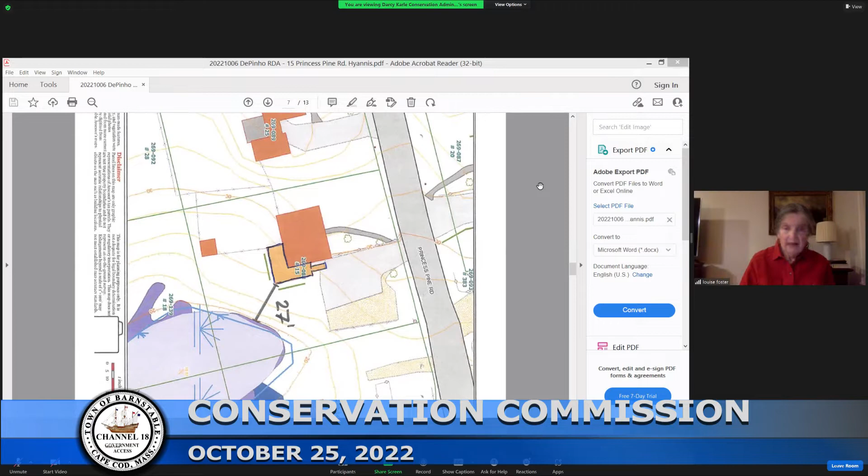Okay, commissioners, questions, comments? Quick question. Mr. DePinho, I gather from this that this is exactly the same footprint, same size as what is existing. Is that correct? Yes, correct. Thank you. I thought so. Channel 18, are there any public comments? Seeing none. Okay, thank you.

Could I have a motion to approve this project as a negative determination? Second. Roll call? Morin, aye. Sampou, aye. Abadili, aye. Foster, aye. Gilmore, aye. Hearn, aye. That's unanimous, Madam Chairman.

Thank you. Next is Michael W. and Judith M. Berry. Build sunroom with existing footprint at 288 Neck Road, Centerville as shown on Assessor's Map 252, Parcel 133. Who's representing the Berries? Anyone? Well, let's table this and, oh, sorry. We were muted. Can you hear us now? I can hear you. This is Judith Berry and Michael Berry. Good, thank you. Welcome.

So are you going to speak to your project? Yes, we had a tree that uprooted and went through our glass solar room last October. We would like to replace that solar room with a new solar room on exactly the same footprint. It is the upper level of a storage unit underneath. Okay. Anything else? I think on this map the work limit line is going to be the deck underneath, so the contractor's line cannot go past where the deck ends. And it's exactly the same footprint.

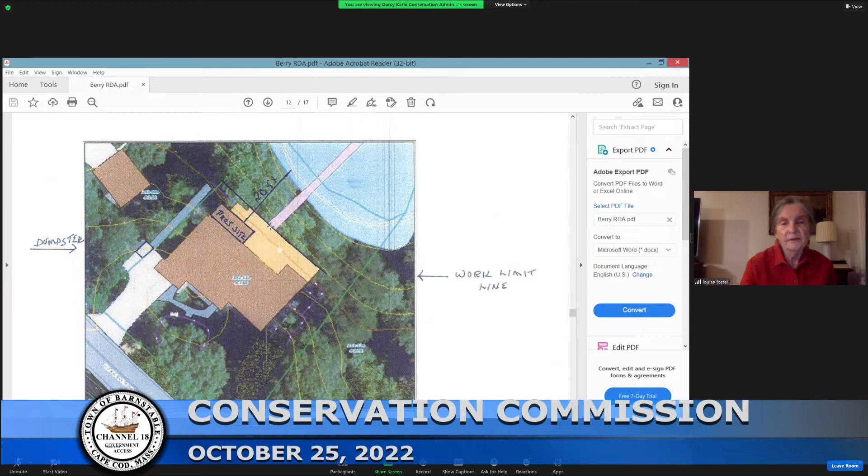Commissioners, would you like to ask any questions? No questions. Channel 18, are there any public comments? Seeing none. Darcy, are you fine with this? I am, thank you. Motion for a negative determination? Second. Roll call. Abadili, yes. Foster, aye. Gilmore, aye. Hearn, aye. Morin, aye. Sampou, aye. That's unanimous, Madam Chair.

Okay, on to the NOI. Herlihy Family Limited Partnership, completed existing shed, proposed fencing, pond wall repair, and buffer land management and restoration at 103 Blantyre Avenue, Centerville, as shown on Assessor's Map 229, parcel 008.

This is Josh. Hi, this is Katrine from Wilkinson Ecological Design. I believe Chuck is here too. Yep, he is. Chuck? There he is. Sorry about that. Chuck Rowland, Sullivan Engineering. Heard my name getting called. I was just in the other room. You guys got through the RDAs quicker than I thought. Chuck Rowland, Sullivan Engineering Consulting.

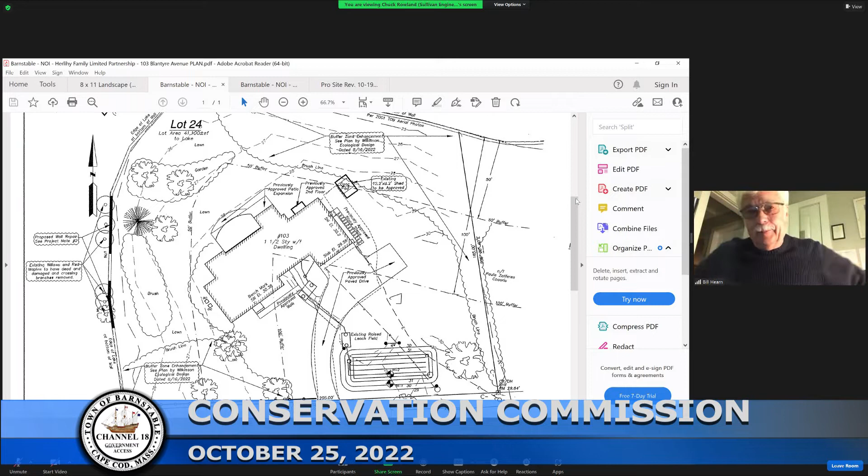Anyone else? Oh, I do. Sorry. Yes, this is a question for Katrine. As far as working down at the edge of the lake, are you working in any of the bordering vegetated wetland? The reason I'm asking is I'd recommend a special condition about this staying under Wilkinson, like notification of any change of the contractor for the restoration, but also given the close proximity to the lake, do we want to also state that this needs to be done by a SERP qualified consultant in the future in case anybody wants to change out the consultant?

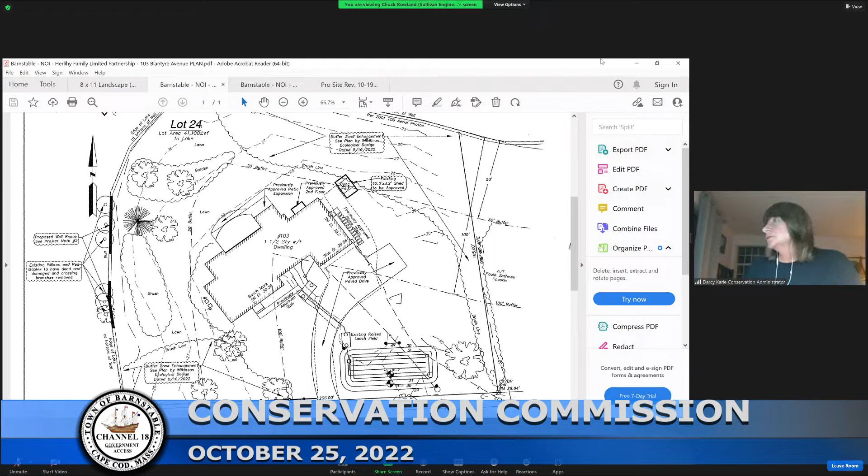So could you just answer that about the proximity to any bordering vegetated wetland, or are you right on the edge? I believe we're right on the edge because there's the wall there, but I can't necessarily see where the BVW is on our plan. I don't know, Chuck, if you know specifically. I see edge of lake at bottom of wall. But those conditions work for us. Okay. So I would recommend the commission state notification of any change in contractor, they need to be SERP qualified, and annual monitoring reports for 3 years, please. Also, what is the fence height going to be? And will there be 6 inches below the fence?

They were asking for a garden fence, and it was kind of similar to a pool fence type, but we're happy with 4 inches below or 6 inches below, whatever the preference is. So when you find out exactly what fence type it is, could you just run it by Darcy to make sure she's happy with it? Okay. If you'll approve a pool type fence, then we have to make an adjustment.

Pool type fence could be a lot of different things, I think. As long as you let them go to Darcy, as long as she's happy with it, that should be fine. Yeah, the only thing we would state is if right along the edge in the 50-foot buffer, if we could have it raised 6 inches. 6 inches. Okay. So you have proposed a 4-foot tall garden fence. You might want to just, on a revised plan, say it's a 6-inch clearance in that area.

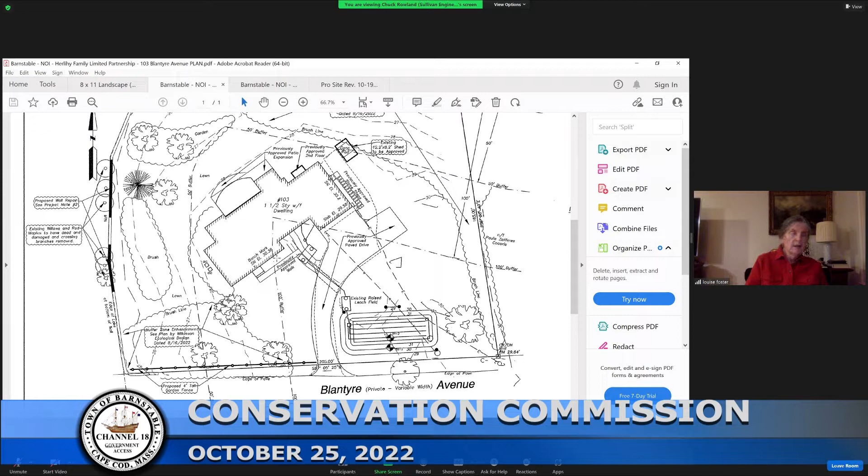Okay, channel 18, are there any public comments? Seeing none. Could I have a motion to approve this as submitted with the addition that there will be annual reports on the progress of landscaping, that if there's a change in the landscaper, that change will be qualified and reported to the office. And I'm sorry, you want a 6-inch gap underneath the fence on a revised plan?

And 3-year monitoring also. I think she had that already. Annual reports. So moved. Wait, I'm sorry, hold on. And beside the consultant, any consultant would have to be SERP qualified. Okay. So I'll include that in the motion and make the motion. I'm sorry I jumped in, Darcy. You're okay. Second? Second the motion.

Okay, roll call. Abadili? Aye. Foster? Aye. Gilmore, aye. Hearn? Aye. Wait, I'm sorry. We got to stop a second. This is NHESP habitat. I'm not aware that we received the letter. You could vote for approval, but you have to wait for the NHESP letter. Sorry, I apologize. Have we received it yet, Chuck?

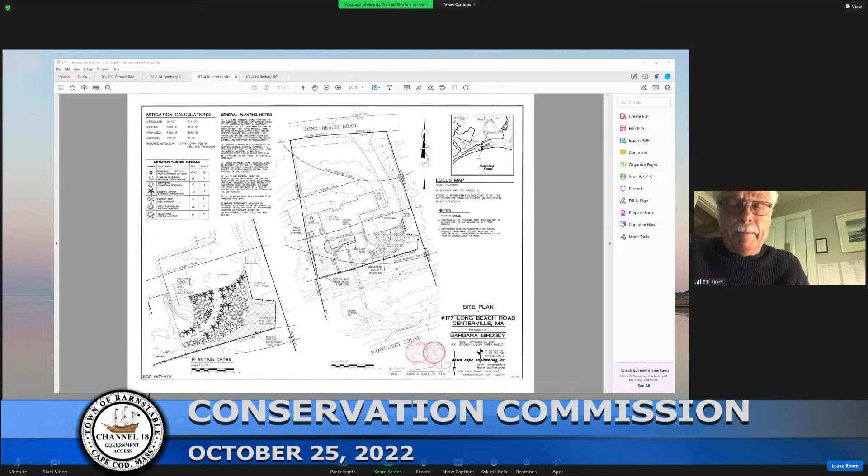And our bylaw basically suggests that, except for really unusual circumstances, we don't want to promote the expansion in the 0 to 50. And so I guess I have a real problem with that patio. However, the rinse station, I don't have a problem with. It's out of the 0 to 50. Anyone else?

Larry? Yeah, mute myself. I'm going back to the balancing test that was discussed a few minutes ago. I went to the property twice because I really tried to visualize it, and then came back and studied the plan and had to go back again. And so I'm looking now, Dan, at what you described; this thing sort of looks like a fancy pipe going around the edges of the patio.

And what you're telling me, I think you said it was 150 square feet. Is that right, approximately? The expansion in the 0 to 50 is 175. It's going from 1610 to 1785. But it's in a highly developed area that's existing turf lawn right now. It's not like it's a virgin site, and there's a fence seaward of this. You use a Lawn-Boy and put down fertilizer. It's not a situation where you're cutting virgin material by any event.

No, I don't dispute that. I'm just looking, Dan, at the hardscape, and let's talk about that just for a minute. That's a good picture of it, by the way. The other thing I'm looking at is that this area here is pretty steep actually. So I take it it's a flight of steps coming up. I don't know how wide you want that to be, 3 or 4 feet, but coming up from the driveway right there, that's pretty steep, at least for somebody in my stage of life.

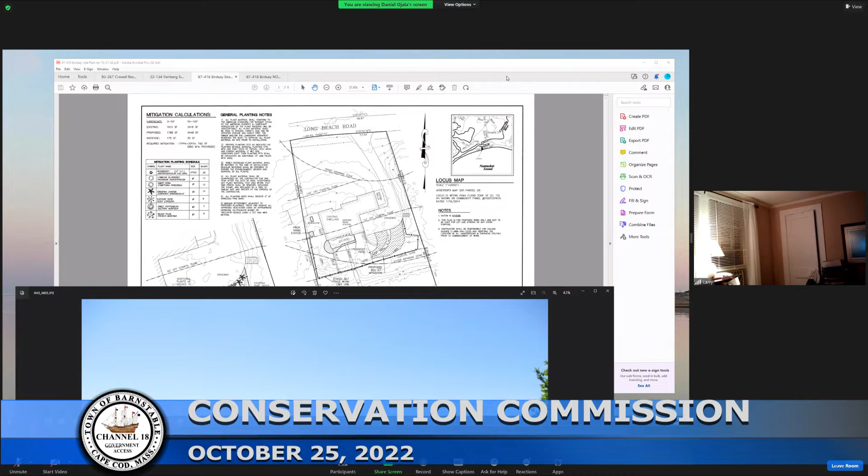And if other commissioners feel they would like more mitigation, I think there's room here to do it that would not disadvantage Ms. Birdsey's use of the property. Something to consider. So that's where I am on it. Thank you.

Anyone else? Yes, ma'am. Oh, John, thank you. Thank you, Louise.

A couple of comments. Again, I sort of start with Bill, that anything that's an expansion of hardscape within the 0 to 50, even, Dan, over grass, hardscape over grass is not much of a trade. So your argument that it's all pre-existing lawn doesn't carry a lot of weight with me. It is an expansion within 0 to 50. We should look at it very, very carefully, maybe suspiciously is the wrong word, and find out what we're getting in return for that. And is it a better deal after, in terms of protecting the 0 to 50 and serving its function, than prior to the requested change?

In this case, I see two things. One, I see a heavily vegetated bank that exists already, which makes me very happy. I look at the mitigation being offered, and I have two comments on that. Number one, I think you put it into an already heavily vegetated area. So the mitigation should go, instead of that area right there, more along the waterfront line where the walkway is. Secondly, if there is going to be some kind of path, it should be defined in terms of width and structure, et cetera. I couldn't find any specs on the proposed path. So I could support it if the mitigation was relocated.

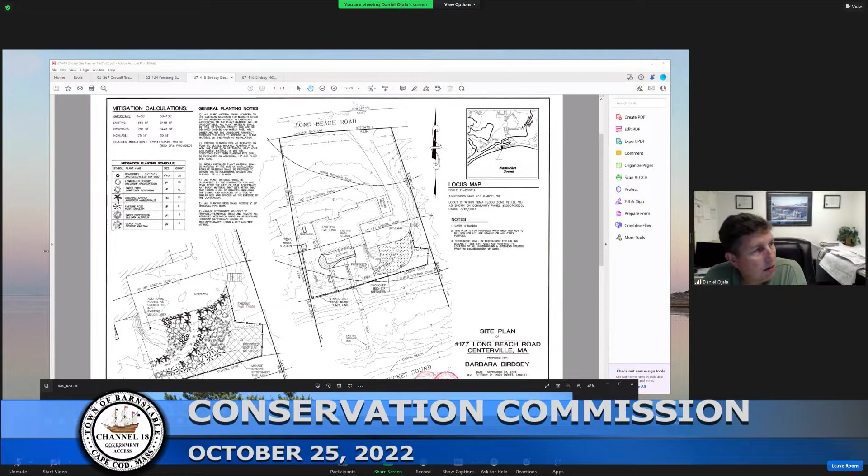Dan, I didn't mean to interrupt, but if you could show that other picture where the walkway is, get a long view of that, that would help me and the other commissioners see what I was talking about. This is the area we would alternately also infill with some vegetation. There's a couple of rugosa roses in there, I don't think they did too well with the drought this summer.

The mitigation plantings, in my opinion, should be located in that area, which is far less shrubbed and protected than where you're proposing to put them. So in terms of the mitigation impact, as I weigh the balance between what you're asking for and that, I think it is significantly enhanced in your favor by relocating those plants to that area.

And I think that's what Pete was saying, I think. That's what I was saying also, I was suggesting it in a different way. Yeah, I think we're all on the same page, just different paragraphs.

Bill Hearn has his hand raised. I do, and I'm not on the same page. I think it's a slippery slope. We have a bylaw that basically says let's try to keep hardscape out of our 0 to 50, and there's a good reason for that.

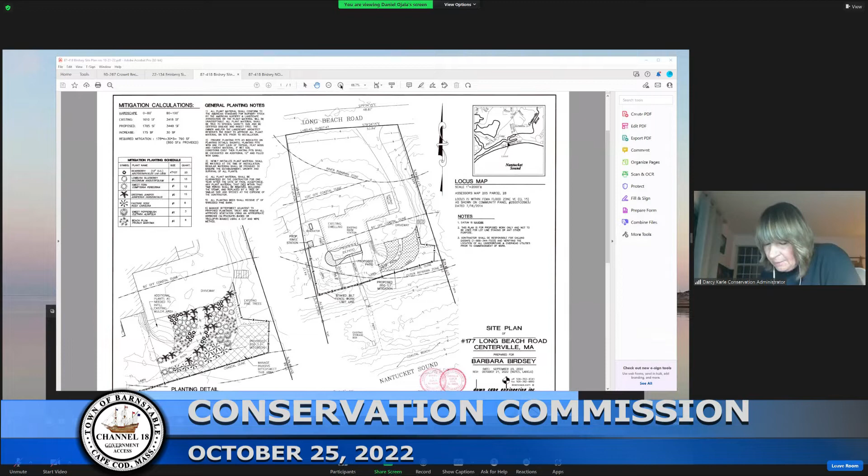I have a comment on the planting palette. If we went forward with the mitigation being adjusted, it's a lot of 1s and 2s, I'd like to see some 3-gallon or 5-gallon mixed in. I also had some concern on the general planting notes - when it says planting beds shall receive shredded pine bark, that should just be temporary; once the mitigation planting goes in, it should be left natural, not be a planting bed. Another note talks about the material surviving 1 year, so we would want a 3-year monitoring report. I would agree with all of Darcy's suggestions.

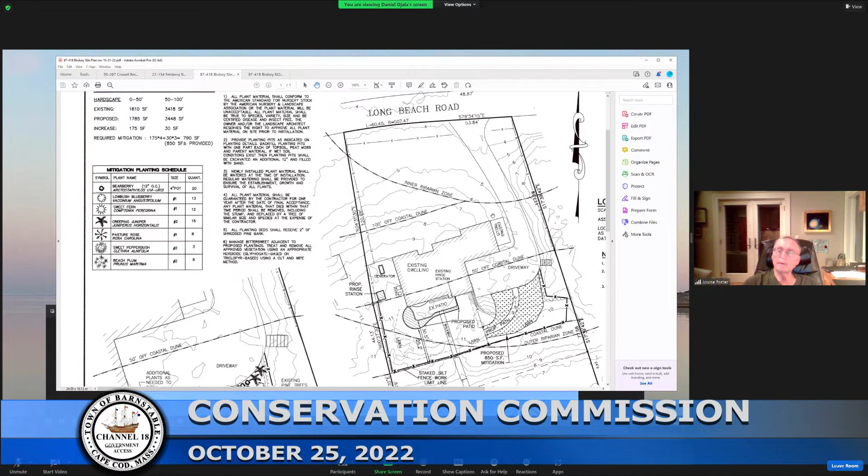Yes, and also I think the blocks on the beach ought to be removed. I would agree, or an enforcement order ought to be written on that. No, sorry, we can certainly agree to remove it. It's not a big item, we don't need an enforcement order. We're law-abiding citizens. Okay, sounds good. It was a misunderstanding. Can I add one more thing?

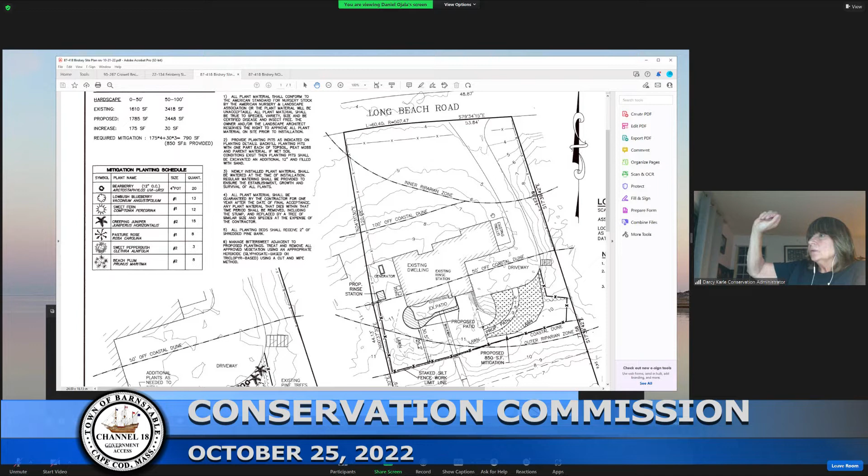Sure. With the relocation of the mitigation, I'd like to see demarcation along the edge of that mitigation area, using stones or something, as approved by staff. All right, so that's moved, I guess, is the next step. Do I have a second?

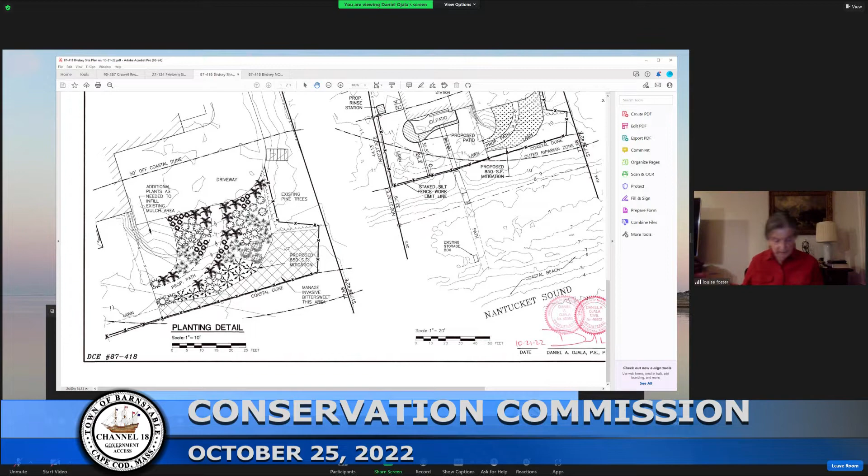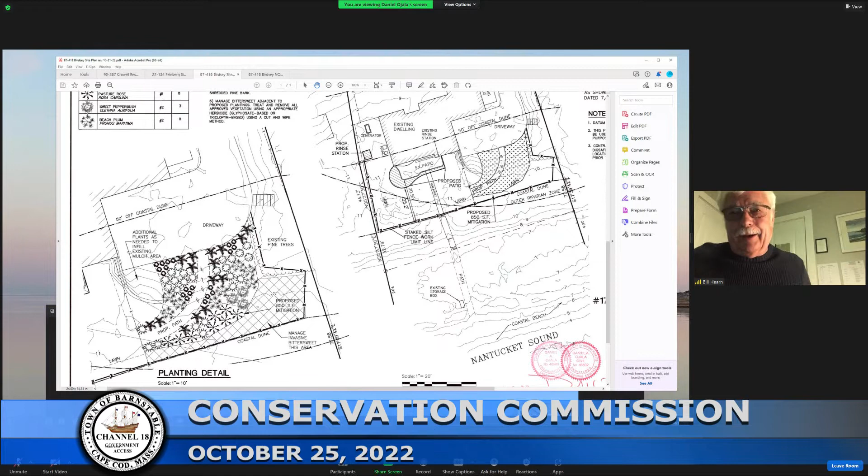Second. Roll call: Abodeely, aye. Foster, aye. Gilmore, aye. Hearn, a reluctant, tepid... I'm voting yes. Morin, aye. Sampou, aye. That's unanimous.

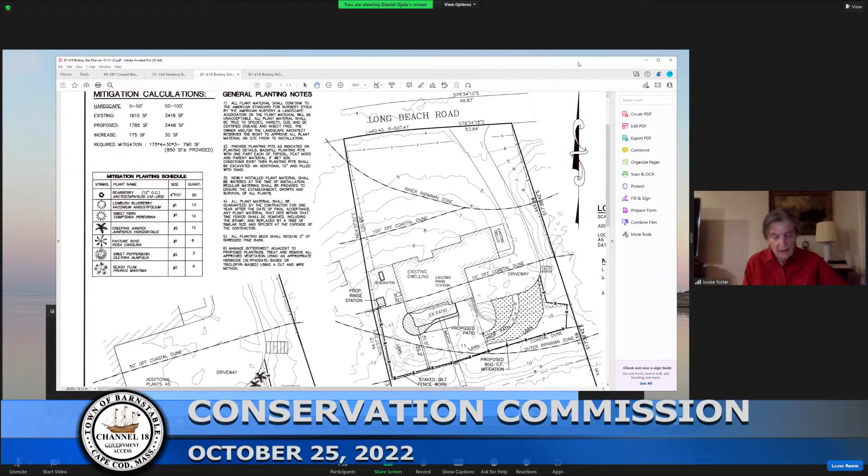Washington SGG Nominee Trust proposed improvements to include a pool house, tennis court, and driveway at 242 Washington Avenue, map 138, parcel 030. It's also abutting 25 East Avenue, map 139, parcel 080, and 45 East Avenue in Osterville.

There's been a request to continue this to November 11th, is that correct, Chuck? Yes, we would like to continue it without testimony. Okay, November 1st, I think. What did I say? It's the 11th. No, sorry, it's the 1st.

November 1st. So do I have a motion? Second. It's been motioned and seconded, Madam Chairman. Okay, roll call: Abodeely, aye. Foster, aye. Gilmore, aye. Hearn, aye. Morin, aye. Sampou, aye. That's unanimous.

Okay, thank you. All right, Lawrence S. Feinberg, replacement of existing landscape tie retaining wall at 100 Harbor Road, Hyannis, shown on Assessor's Map 306, parcel 173-007.

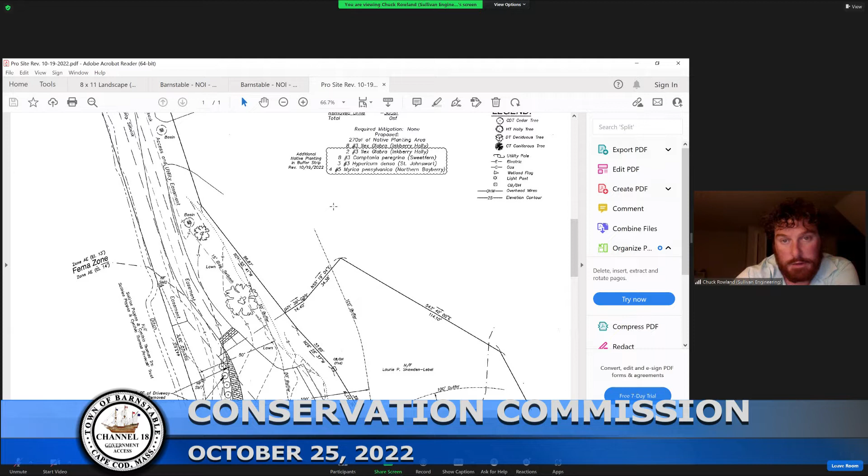So we have the 8 inkberry hollies that were previously proposed over here on the western side, on the Salt Marsh side, and then the 10, 13, 14, 15, 16, 17 plants that we proposed on the buffer strip to the river that are all in the bubble right here.

Well, I'm back to what I remember, and I took notes on it that I have on my paper. That was, let's call it — I don't want to call it a trade-off — that was what the proposal was, coming in to change that, and I think there was a strong consensus on the Centerville River frontage of the property that's where more vegetation could go. I don't want to take credit for suggesting it, but I know I did mention it. So I understand where John Abodeely's coming from, and it's not so much a question of whether we can change things as much as whether or not the proposal is what was either consensually agreed to and/or whether it's sufficient. And I'm not skillful enough when it comes to measuring plants to know that. But I do believe, as George stated, that what the changes are that Chuck has proposed is basically what we agreed to. So where that leaves us and where it leaves Lisa Cleary and where it leaves Sullivan Engineering, I don't know. But I support what Chuck has proposed.

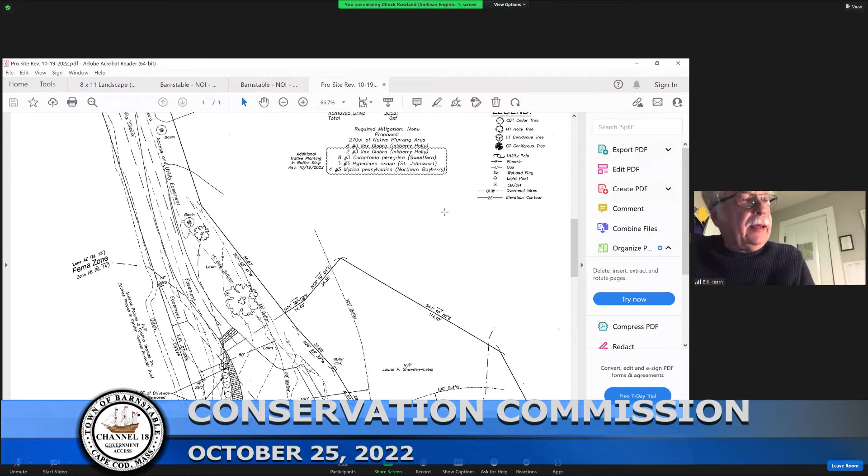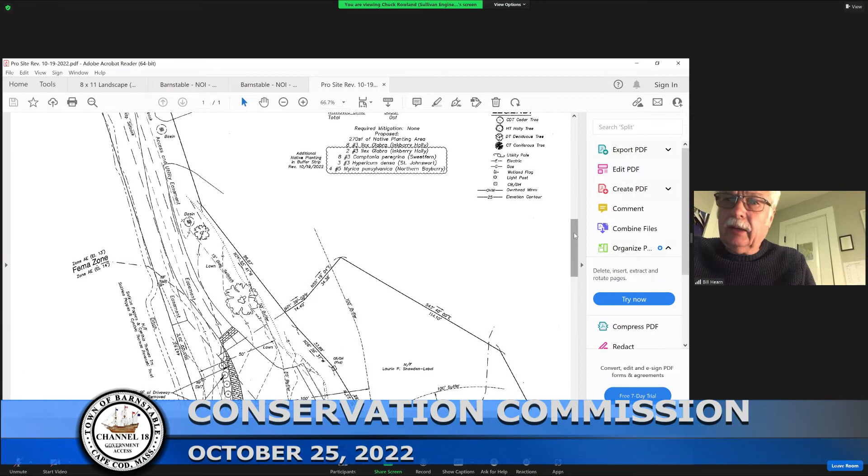Hey, Bill. I'm a little fuzzy about where I'm at. The new plantings — are they not in the 0 to 50 over by the Centerville River in the southern area? I thought I was watching your presentation and it seemed like you were pointing. I had a hard time seeing exactly, but is it not in that southern end? They are all in the 50-foot buffer and they are all on the southern end.

So we have the salt marsh. These are the salt marsh flags, and then these are the plants right along the salt marsh that we have proposed. These are all directly abutting the salt marsh. And then we have these 5 plants up here that are actually going in lawn area. And all the plants that we have proposed are in the 50-foot buffer.

That being said, some of you were saying you looked at the film from last time. I did not. But my recollection, John, was that I thought, well, it's not enough mitigation. It just didn't move me, if you will. There wasn't much mitigation. And that you, John, had said you were really interested in the Centerville River. And I thought it was the southern area you were trying to buffer.

And so therefore, I'm thinking that what George and Larry are thinking is right, that what you wanted and what we were looking for was a lot more planting in the southern end in that 0 to 50. And I think that he's doing what we wanted. That's my recollection.

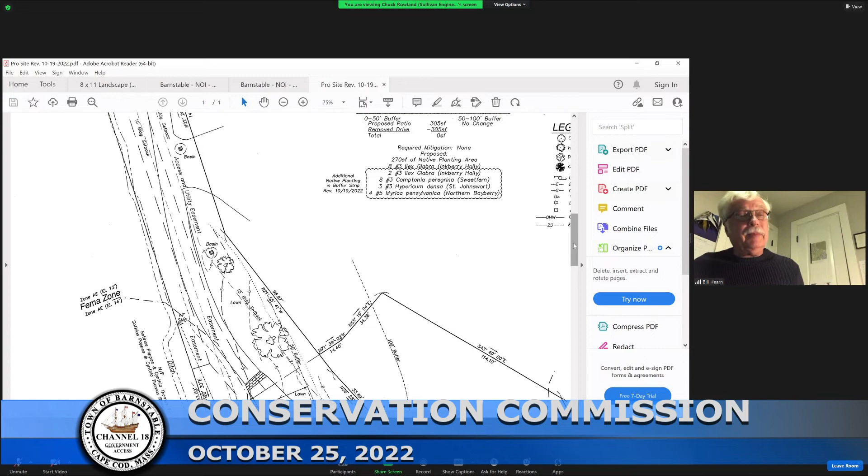And yet the project itself seems to be so, if you will, detrimental to the Centerville River and the environment and the resources, that what I'm personally feeling is, well, I'm hearing John and I'm thinking maybe it's not enough. You made an offer, but it's really not enough. So your question becomes, what's enough? And I think that's a fair question, at which point I'll turn it over to John to perhaps provide a what's enough. Because I'm supportive of John's position that maybe we're not getting much here.

Thank you, Bill. In answer to that, Chuck, first of all, I want to say this clearly. I think you came back with a very good faith analysis based on the prior meeting. I don't question that at all. I also understand in your role as a consultant, you want as much clarity as you can get, so when you go back to your clients, you could say, here's what you need to do in order to get an approval. And I respect that. And obviously I respect you and John O'Day and your firm exceedingly highly. Excellent work.

However, I view these expansions within the 0 to 50, and I view the guidelines and the regulations, which say everything is site specific, to go down and look at it. And I spent a long time there today. As I said, I took a bunch of pictures, sent them to Darcy, and raised some questions on the phone to her. In fact, you were on the other line at the time, and she dismissed me to talk to you.

So I look at these and I say, under our guidelines and regulations, every commissioner needs to reach a balance in his or her mind. Is the benefit to the 0 to 50 greater, so that we are getting more than we are, quote, giving up in terms of protecting that very valuable 0 to 50 zone? In this particular one, when the first proposal was just the driveway for the patio, I said, not even a chance, not even close to a benefit for the 0 to 50.

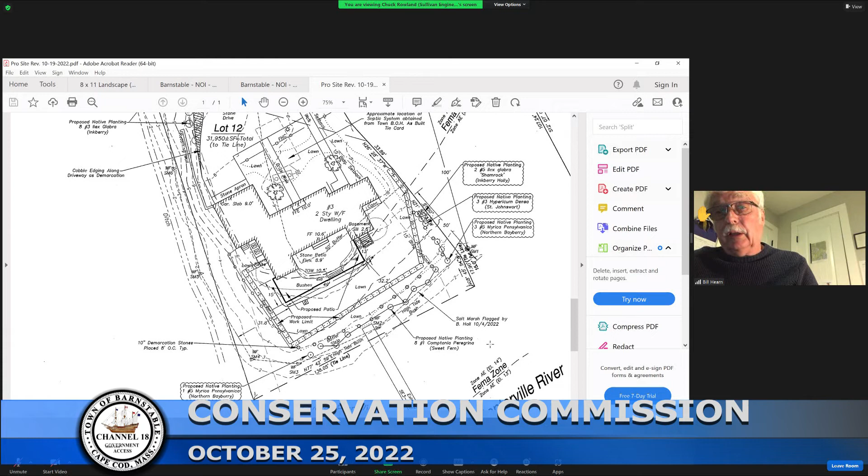Bill? Yeah, I don't know if I have to state this or not, but you want to continue to retain the removal of that driveway section and planting along that marsh along the western side. You still want to continue to do that. It's not like, oh, now we're going to plant down here. Well, we don't have to worry about the driveway. We're doing the driveway too. That was my thinking as well, Bill. I certainly didn't mean to say that was eliminated. It's still part of it. Yeah.

Okay, Chuck, do you want to confer with your clients? Sure. After the November 1st, the next slot for continuance is the 22nd of November. Perfect. No, that's not a date, Louise. What? That's the Tuesday before Thanksgiving. There's no hearings that day. It's the 8th and 15th. Let me see, I have a note from Kim saying that. Oh, we do have the 22nd available. Really? Yeah. Well, that was intentionally not booked, so you'd have it Tuesday before Thanksgiving. So my schedule shows 1, 8, 15, and 29. Those are the dates that we had.

Yeah. Chuck, if you're willing, and maybe you can't, if you're willing to make the moves that Bill and Larry and I suggested now, then I think we could vote on it tonight. But if you're not able to do that, you need to confer, then take the continuance. That's your call. So, are you saying move work limit, remove irrigation, and relocate these 8 proposed inkberry into the buffer strip? Yes, and then as Darcy added, the irrigation is temporary, it would become a natural. And I don't know, Darcy, if you need demarcation.

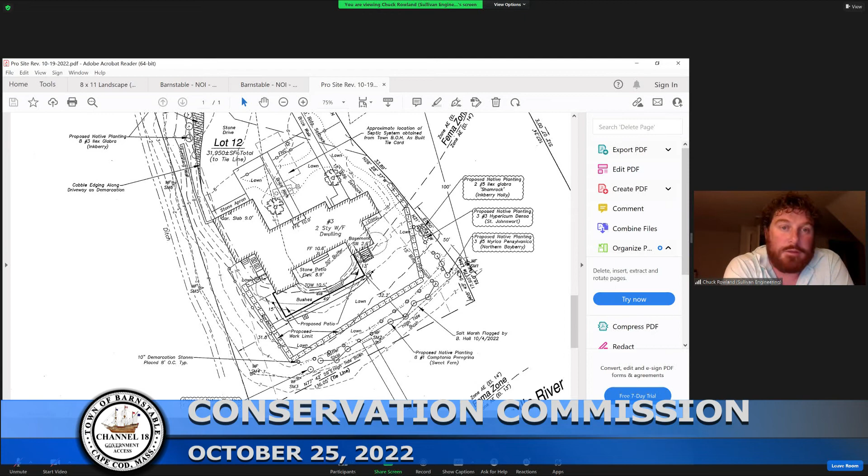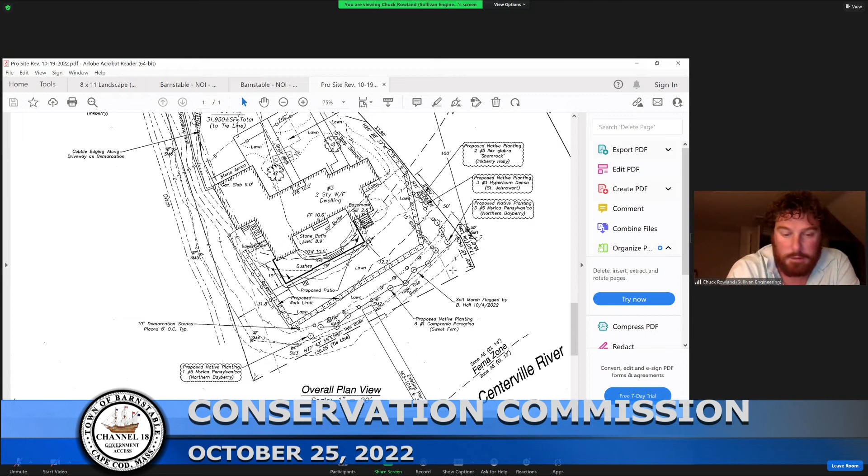I think there's a landscape architect involved, and he definitely wants to be able to review this and talk about it with me. So, and it sounds like this is kind of getting... Okay, Chuck. Sounds like everyone would be more comfortable looking at a revised plan. So if you are, okay, that's fine. Right. Peter has his hand up. Yeah, Pete has something to say.

Yeah, a work limit line just means you can't go past it; it doesn't mean you're increasing the vegetation area. It just means that's the limit of your work. So my understanding, listening to all of you talk about this on your talk radio show here, is that Abodeely had a great idea. You just take those higher inkberries and those taller things, bring them down in front, but put them in the buffer area that you'd already agreed on. Don't take more lawn away. Just move the work limit line so that you're not wrecking any of the lawn as you work. Is that my understanding, Abo?

Absolutely, 100% clear. And I thought that's what would make Chuck happy, would make his customer happy, and we could vote on that and he could get on with life. That's what I thought. Does that work for you, Chuck? Sure. Okay. John, why don't you make a motion? Okay, all right, let's make a motion. Do we need public comment first? Yeah. Seeing none. No public comment.

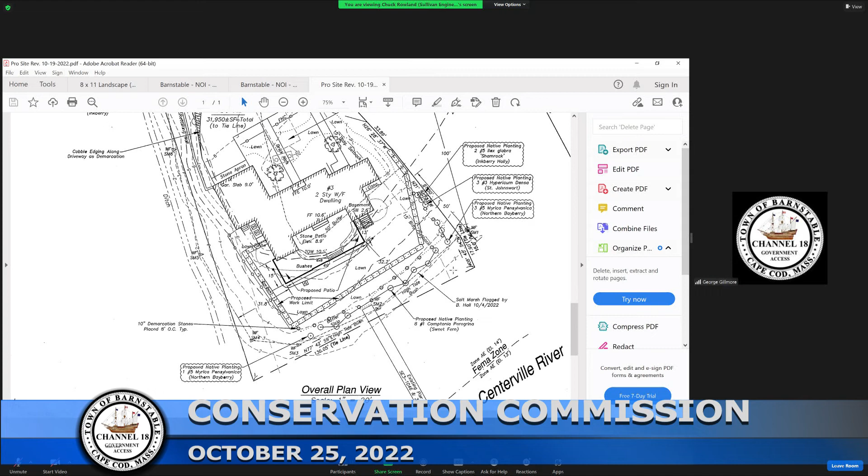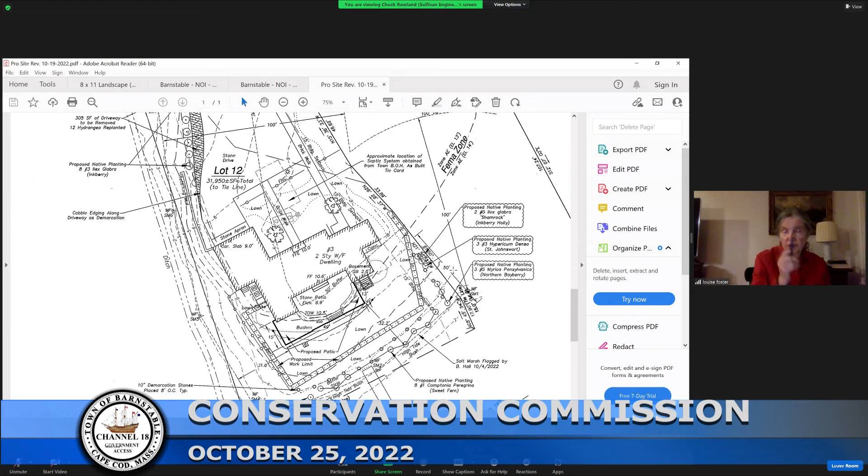Let's see. A motion to accept this proposal with the proviso that the mitigation in the northwest corner be moved to the area along the Centerville River, and that there be annual reports required for the next 3 years, and that the work limit line be moved closer to the structure being proposed.

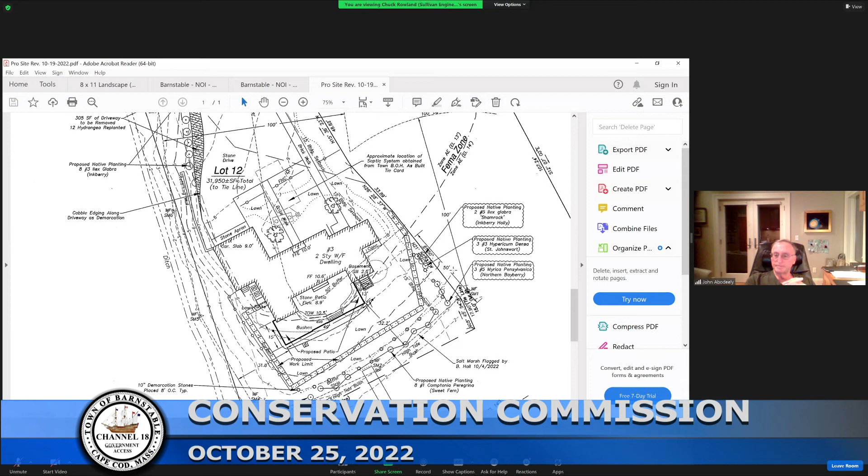Louise, if I could jump in on that motion before it's made, if you don't mind. No, go ahead. What we're saying is that those plants along the right side be relocated to the existing buffer area or planting area in front of the Centerville River. Right, Chuck? Yep. Secondly, that the irrigation there is temporary; it should be removed after 3 years. Thirdly, that there'd be demarcation of that area. Fourthly, that area would be left natural and not become a landscape planted area, as Darcy suggested. And finally, that the work limit line be moved to 7 feet off the proposed work. And that would be subject to receipt of a revised plan showing those conditions.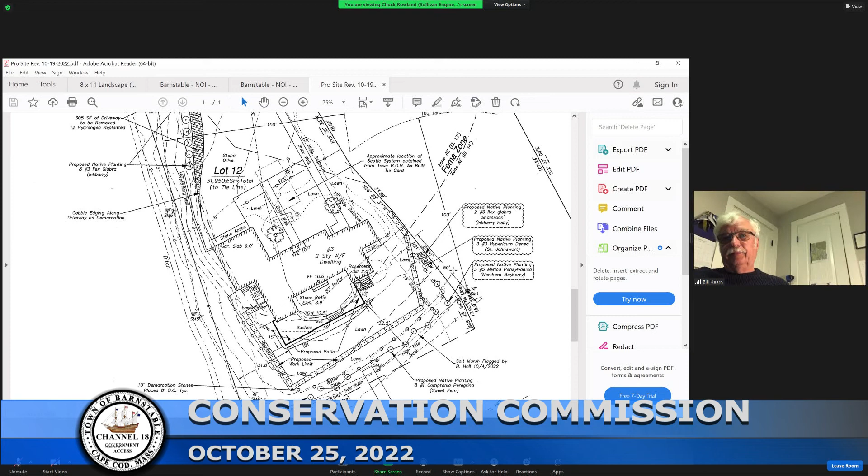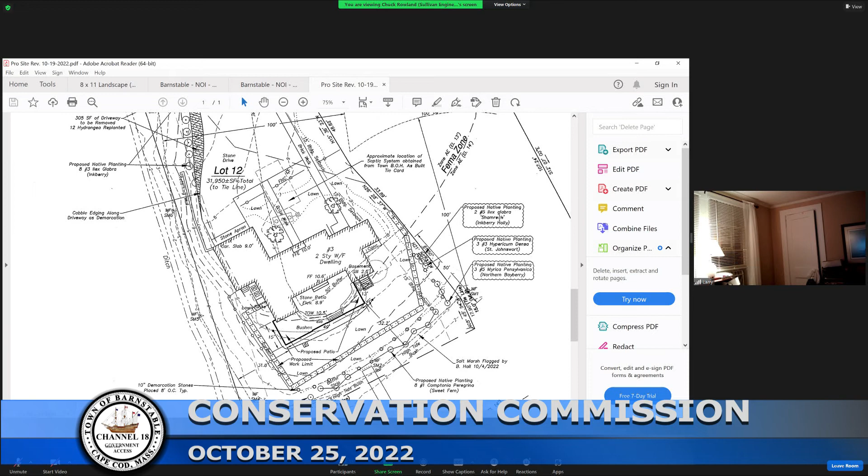All right, do we have a second? Second. Roll call. Abadili, aye. Gilmore, aye. Hearn, aye. Moore, aye. That is unanimous. Thank you very much, guys. Thanks for working with me.

Hey, Chuck, again, I just really got to say for the record, I understand where you're coming from. My words were in no way to impugn what you came back with. I think it was a great, good faith effort on your part. And if there was a misunderstanding, I'm glad we talked it through. Cool, man. Thank you very much for working with me. Have a good night. You as well.

Okay. Our last continuance is Christian Camp Meeting Association, proposed relocation of existing beach sand under and around structure within the coastal beach at 915 Craigville Beach Road, Centerville, as shown on Assessor's Map 225, parcel 001. And we were waiting for an NHESP letter, which came in today.

The concern is the shorebirds, specifically the piping plover, have been known to inhabit that area, and therefore they would want to see the following happen. That the time of year would be restricted, and the relocation of the sand shall not occur during the period of April 1st through August 31st. That the sand relocation and redistribution shall be evenly distributed at a grade not steeper than 10 horizontal, 1 vertical; reduced grades, e.g. 15 horizontal, 1 vertical, are approved.